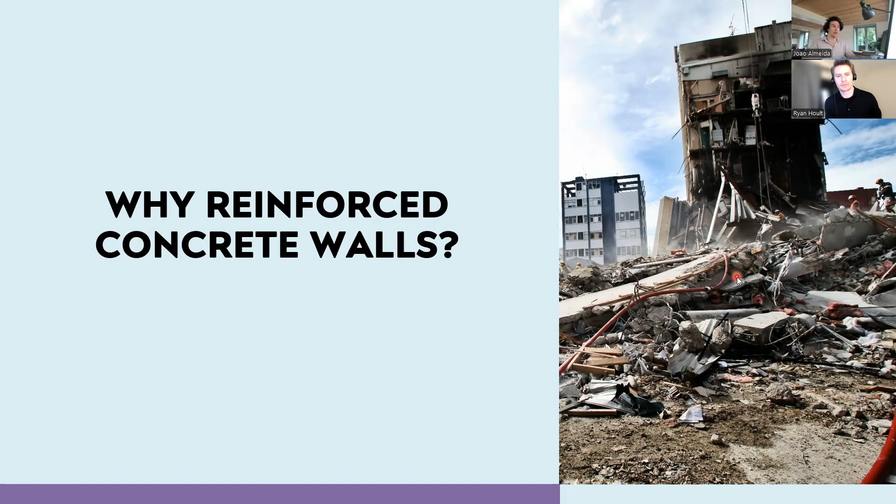So why reinforced concrete walls? As I'm sure you all know, reinforced concrete walls are likely the most effective lateral load resisting system for earthquakes, and also for wind actions in tall buildings, more flexible structures, and they tend to perform very well during earthquakes. But that's not always the case. Here is a picture from Christchurch after the earthquakes of 2011, so it is important to improve the understanding of this type of member.

In Serbia, as far as I could understand, yesterday I did a very quick research on your type of building stock typologies, and if I understand well, reinforced concrete is basically the backbone of your modern building stock. If this is correct, you had a very rapid urbanization from the 60s, 70s, 80s up to the 90s, mainly using prefabricated RC panels, Soviet style.

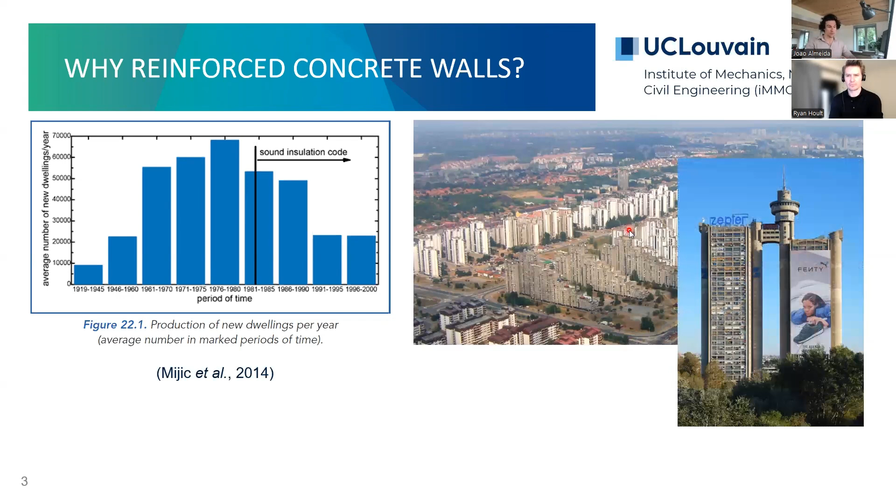And also some interesting brutalist architecture, which is actually something that we also have here in Belgium, namely in Louvain-la-Neuve, where our university is located. But it seems like after the 90s, the pace of construction reduced a little bit. I don't know how things stand now in Serbia, but I am pretty certain that reinforced concrete is your main type of construction, and basically all medium and high-rise buildings in Serbia are made with reinforced concrete, and most of them will have walls.

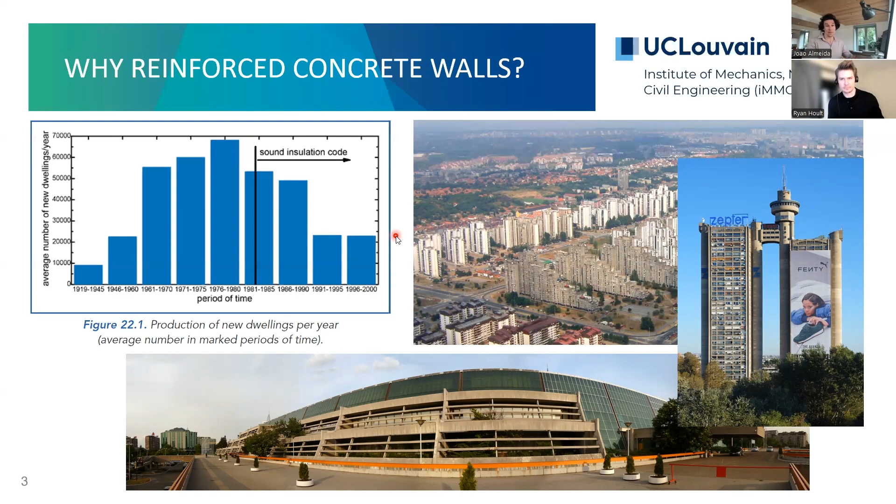I was also not familiar with the seismic hazard in Serbia. I can see that Belgrade and apparently some of the other two bigger cities are mainly in low seismicity regions, but I guess all of your design or assessment of existing buildings in more moderate to high seismicity regions, it would be interesting for you to know a little bit more about walls.

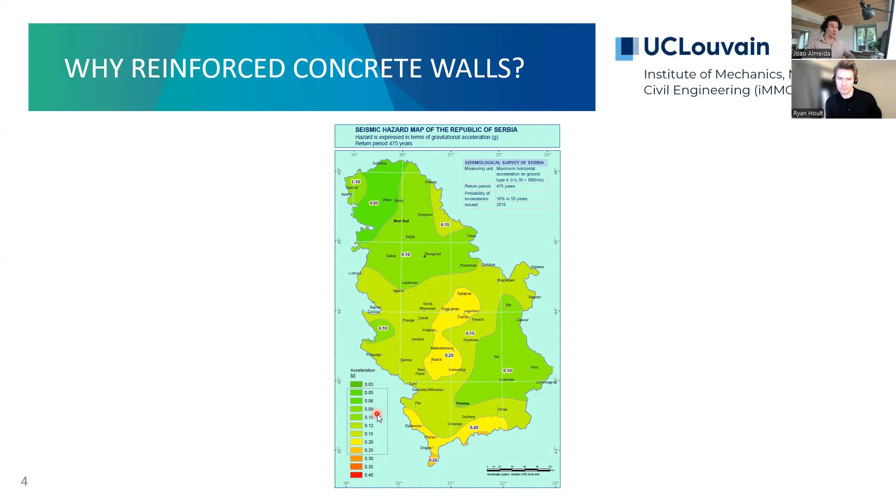So we will basically share with you an overview of our experimental work on different aspects. We were doing research that was always relatively specific, so we will not share all the details, and we will skip all the numerical part. We will basically present the main findings and some key takeaways.

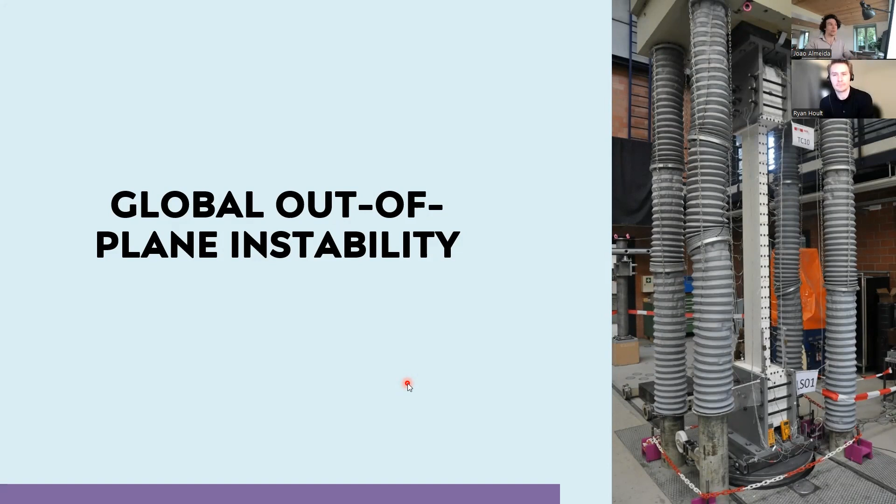So the first topic is global out-of-plane instability. This corresponds to some of my first experimental research when I was still in Switzerland at EPFL. This global out-of-plane instability corresponds to maybe a less known deformation and failure mode for you. You certainly all deal with shear failures and flexural failures, more brittle, more ductile, maybe sliding shear.

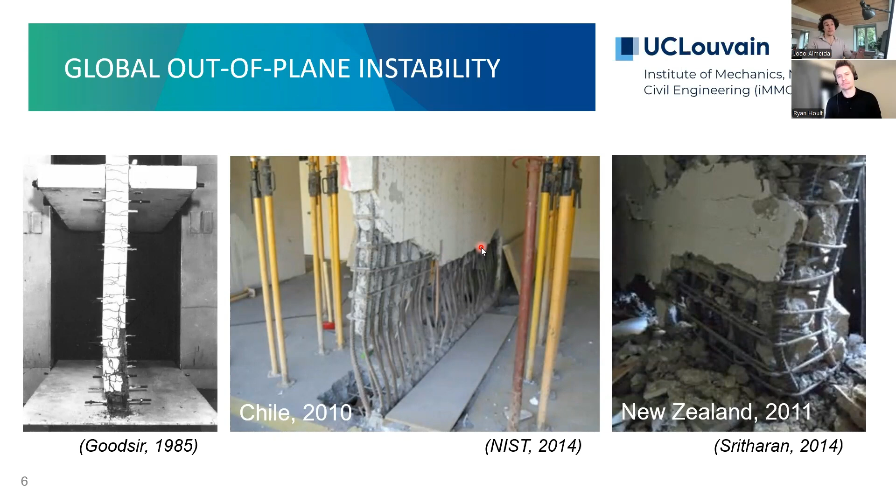So basically, just to give you a quick overview of how this mechanism develops: if you consider a wall under seismic action in this simple representation, you will eventually have some flexural cracks that form at the end regions of the walls. These cause tensile demands in the rebars within the cracks, and these demands, if sufficiently high, will cause the reinforcement to yield.

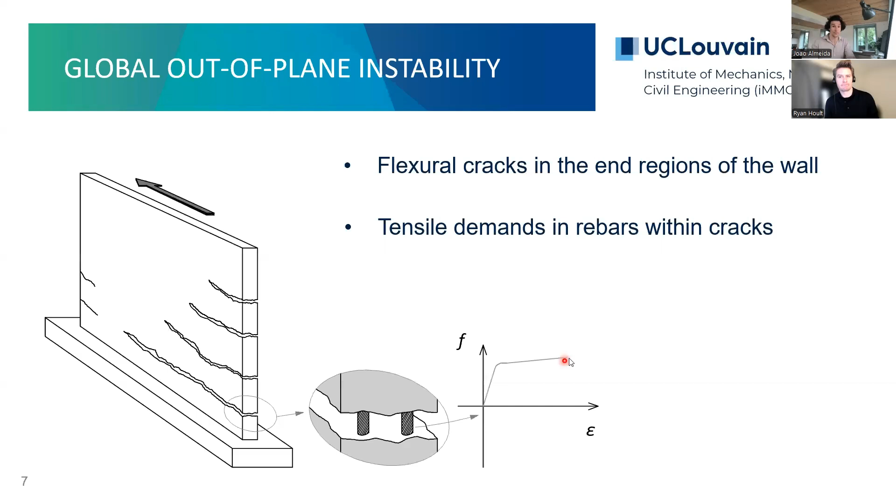Then during unloading, while the cracks remain open, you have all the compression force being resisted by these two rebars—if there are two layers of reinforcement.

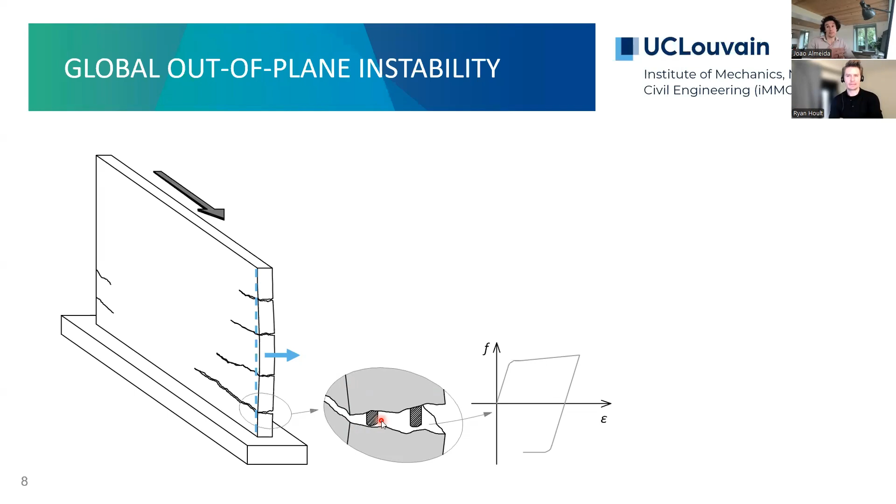In compression, if the cracks do not close, it may even happen that the reinforcement near the concave side, the intrados of the wall, may also yield in compression. At that point the out-of-plane stability is greatly compromised, and there will be high developments of out-of-plane bending moments and an eventual increase of displacements.

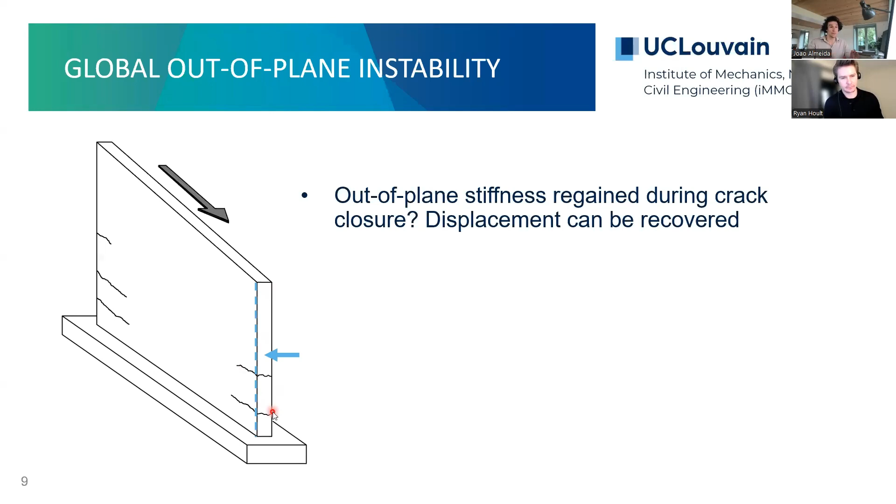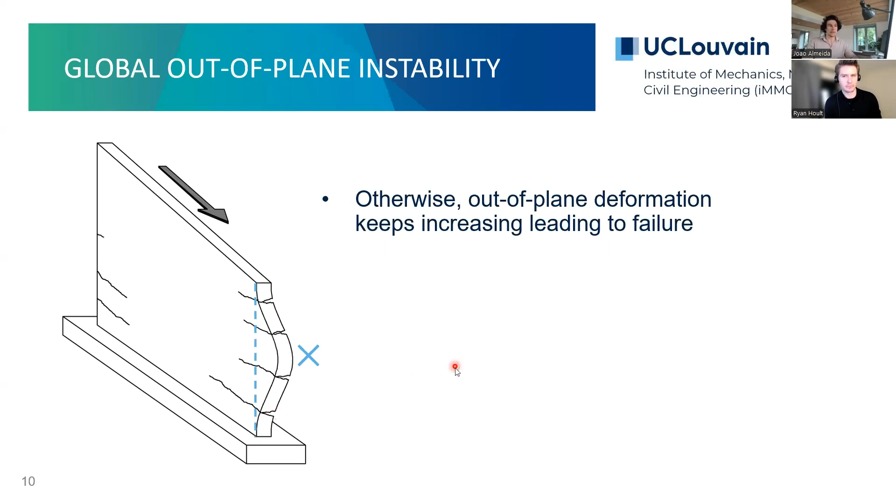At this point there are basically two scenarios that can occur. Either the cracks on the intrados will close and some stiffness will be regained, restoring the verticality of the wall. Or, if that is not the case—if the second reinforcement layer yields before the crack closes—then theoretically at least, out-of-plane displacements can increase and possibly lead to a buckling failure.

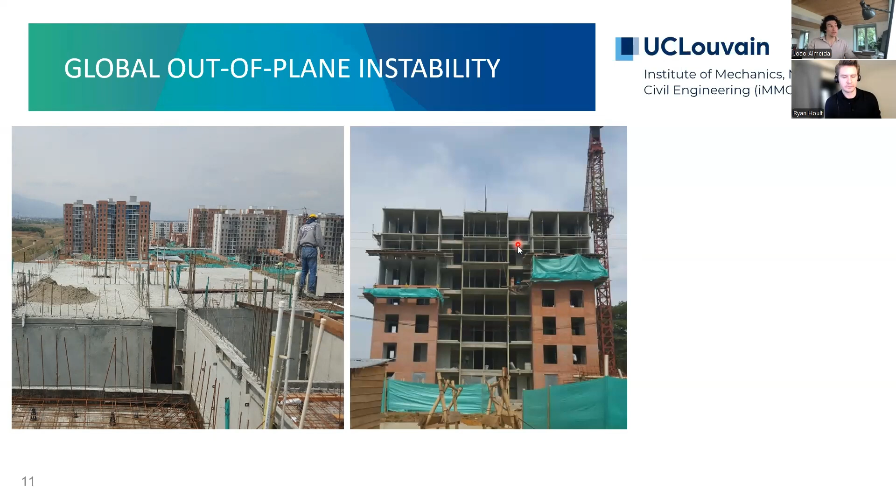So this was basically just a quick context. This was research that started around 2010 in some countries in South America, namely Colombia, where they really started having a massive amount of construction with very thin walls—when I say thin, like 10 centimeters, sometimes 8 centimeters, with just one layer of reinforcement, and besides this, with low ductility meshes.

It was in this context that we started studying this deformation and failure mode, and we tested it through wall tests and boundary element tests. So for instance, here is an example of a wall that we have tested.

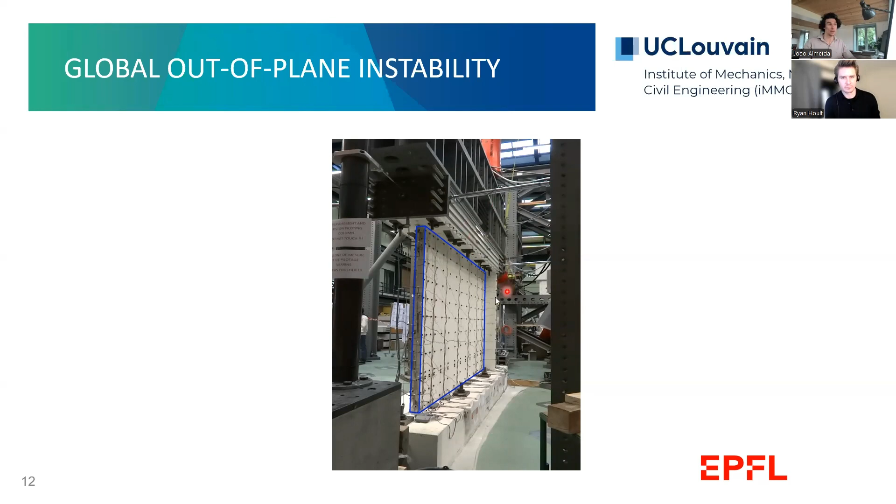There was also vertical loading and bending moments applied, but if you just look at the hysteretic response in terms of force-displacement, you maybe would not see anything particularly specific to this response. However, if you look at the out-of-plane displacement—

now I'm going to quickly play this video, more of a time-lapse, as we load the wall from the right all the way to the left. I'll click it, and you will see the wall starts displacing out of plane, then the cracks close, it straightens up, and eventually the wall will fail.

So basically, in a simple way, we could see that there was some influence of these out-of-plane deformations on the failure of the wall.

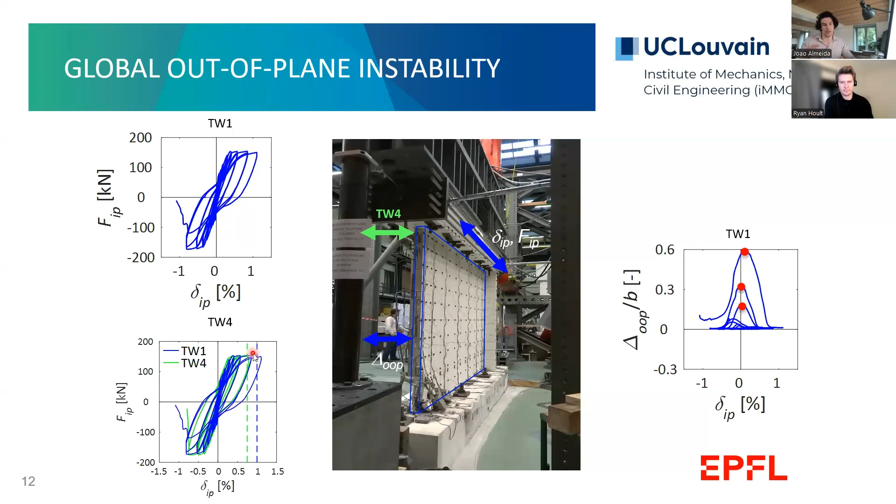We also tested a second wall where we imposed simultaneous out-of-plane displacements at the heads of the wall. We could see that this also caused some decrease in the displacement capacity of the walls. I don't really have much time, and for other reasons I will skip this.

Still within this topic, there was a second experimental campaign that we did, on boundary elements. I don't know how familiar you are with experimental programs, but these boundary elements are tested under tension and compression, and the idea is that for a flexurally responding wall, they work as proxies of the behavior of the wall.

The idea is that you have a simpler loading, just uniaxial loading. The test specimens are also cheaper, so this is a technique that researchers use mainly when we try to analyze the effect of several parameters.

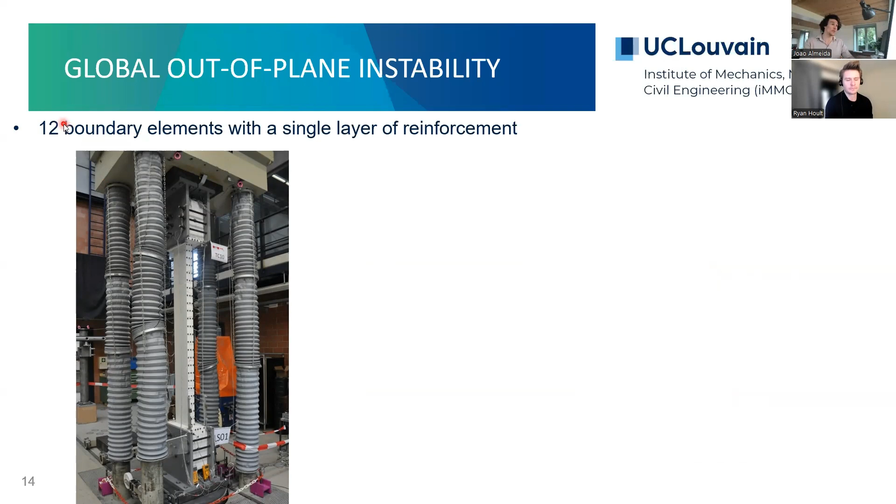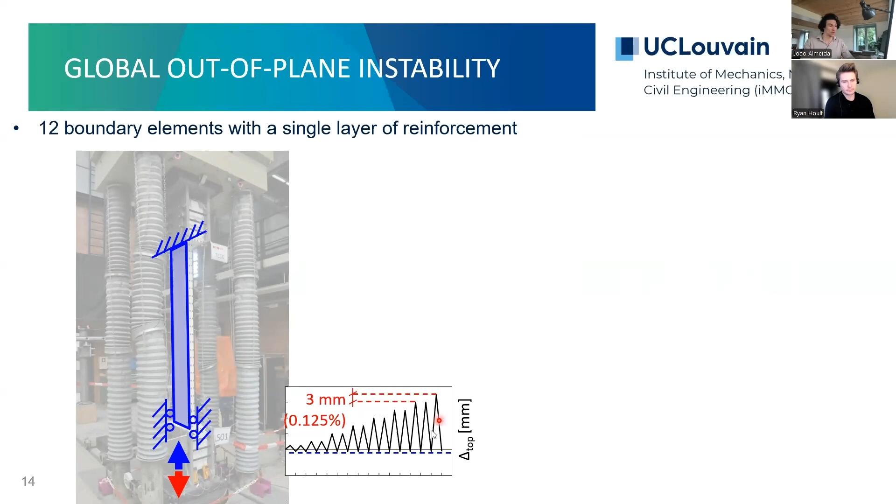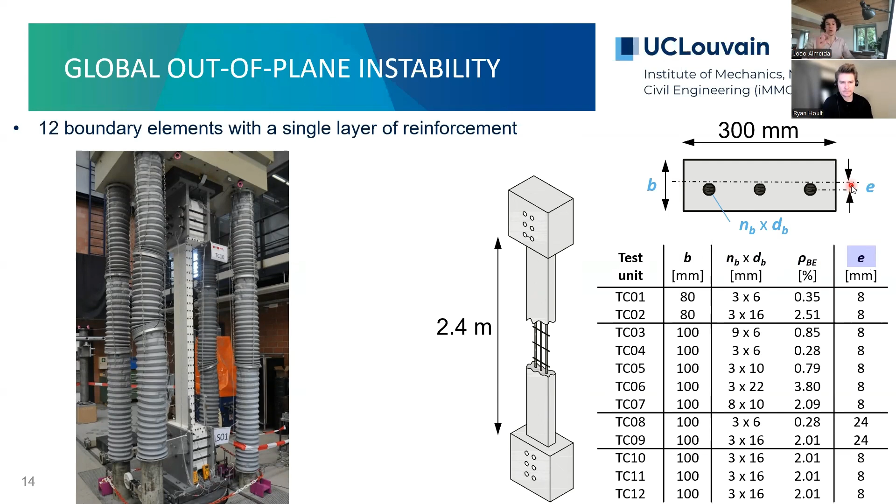Okay, so this is what we have done. We went on to carry out boundary element tests of 12 units with a single layer of reinforcement, very highly monitored. We imposed a top displacement, actually applied at the base of the specimen, with a loading protocol of increasing displacement. We analyzed the effect of several variables: the thickness of this element, the number of bars and their diameter, the percentage of reinforcement content, and finally the eccentricity of the position of this single layer of reinforcement.

The more reinforced this boundary element is, the more prone it is to this instability mode. Now, this was a very extensive study and I will not share more details, because I believe in Serbia you mainly build with 2 layers of reinforcement. A summary of my experience, also with many analytical and numerical studies, is that if you are building with 2 layers of reinforcement and you respect the minimum thickness prescribed in modern codes, such as the Eurocode or the previous codes you are using, global out-of-plane buckling—not local, but global—will generally not be a concern. This is another message I would like to share with you.

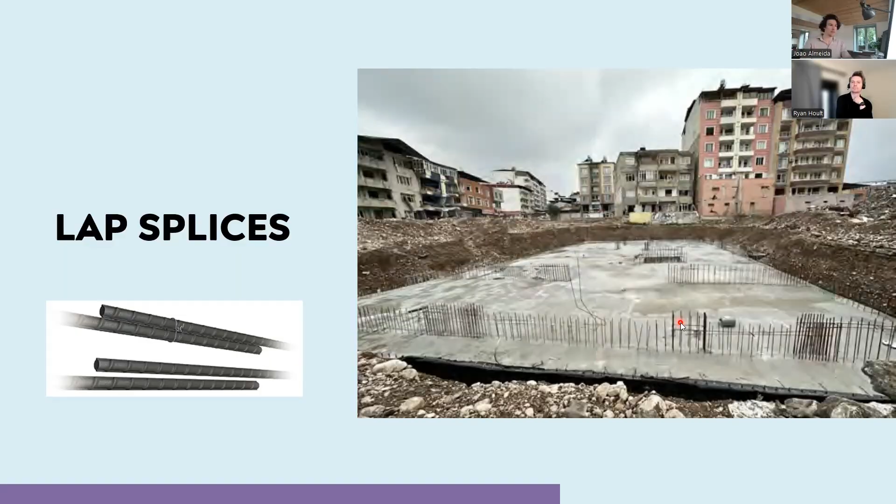So it's something that may be interesting for you as well, to understand a little bit the effect of this design detail. Here we also tested for this topic—we conducted tests in walls and also in boundary elements.

So basically in walls—again, a very simple story I'm telling you—but here what you can see, comparing the cyclic response of a wall without lap splices in blue and with lap splices in red, is that the presence of lap splices, just over this short lap splice length, can actually very significantly reduce the displacement capacity of the walls.

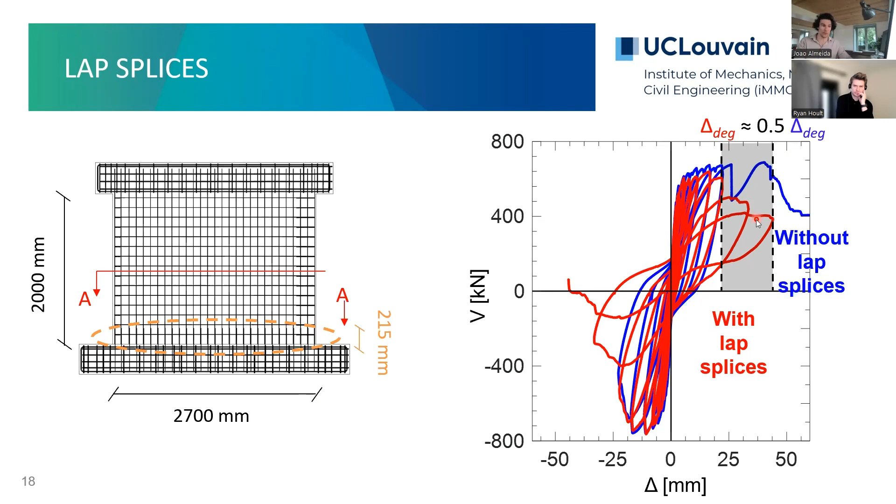Now, at the start of the research, this was already maybe 9 years ago, this is basically what we knew from different contributions of different researchers: that well-detailed lap splices, if they are in the plastic hinge region, will essentially double the reinforcement, and this will force the relocation of the plastic hinge length above this region, which is not ideal because you can have increased shear demands.

But well, so we knew this. We also knew, from several wall tests, that short and unconfined lap splices will possibly mean that the wall will fail even before reaching its flexural strength—it can somehow fail somewhere here without reaching the capacity in flexure. Whereas a medium length and with medium confinement, you can have, as I've shown, a reduction in the displacement capacity.

And we knew, although not in much detail, that some of the parameters influencing the displacement capacity were the lap splice length, the confining reinforcement, the moment gradient, let's say the shear span ratio, and the loading history. So we decided to investigate, using these boundary elements, the influence of each of these variables.

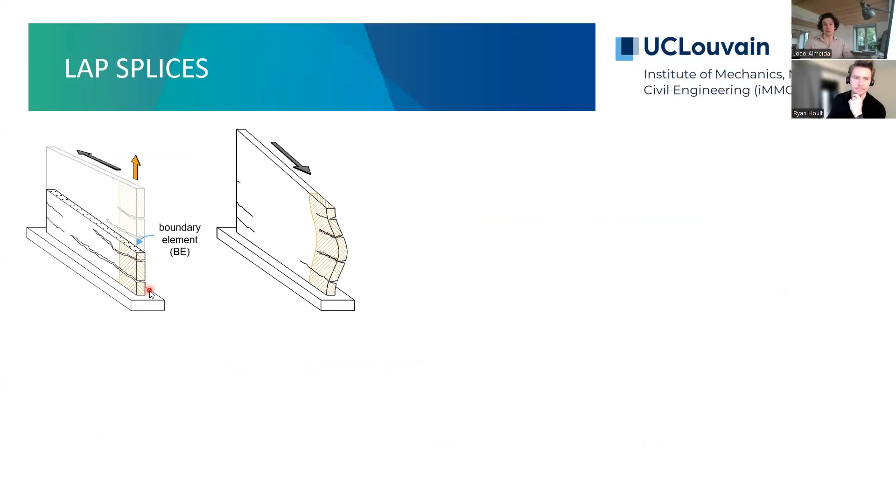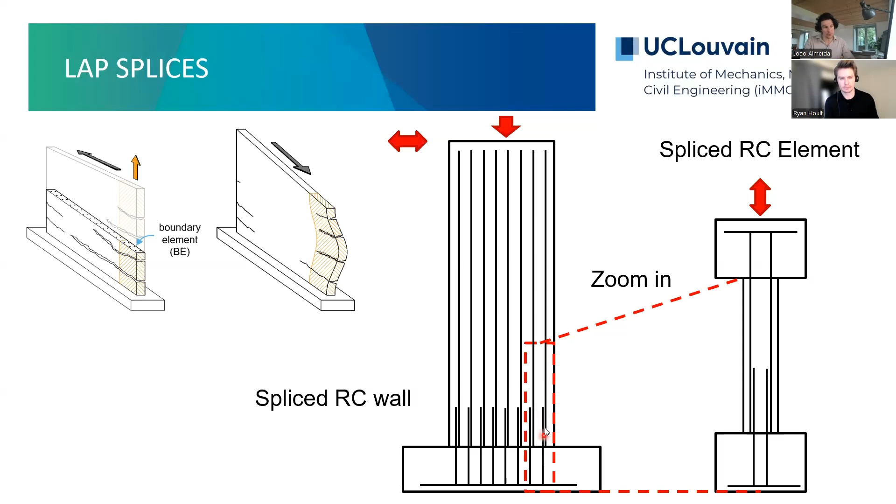These spliced RC elements are supposed to be representative of boundary elements that are mainly subjected to tension and compression.

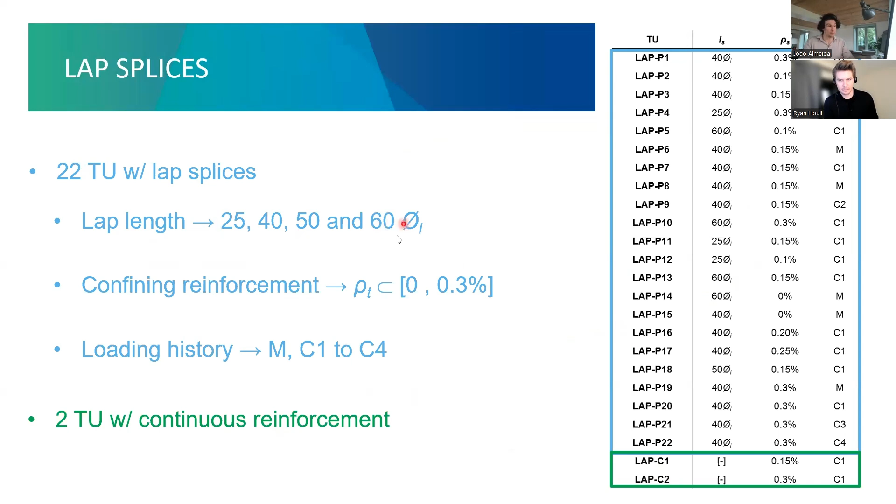We tested 24 units: 22 with lap splices and 2, shown in green, with continuous reinforcement as a reference. We varied the lap splice lengths from very short to pretty long, the confinement reinforcement from 0 to 0.3, and the loading histories from monotonic to different types of cyclic loading.

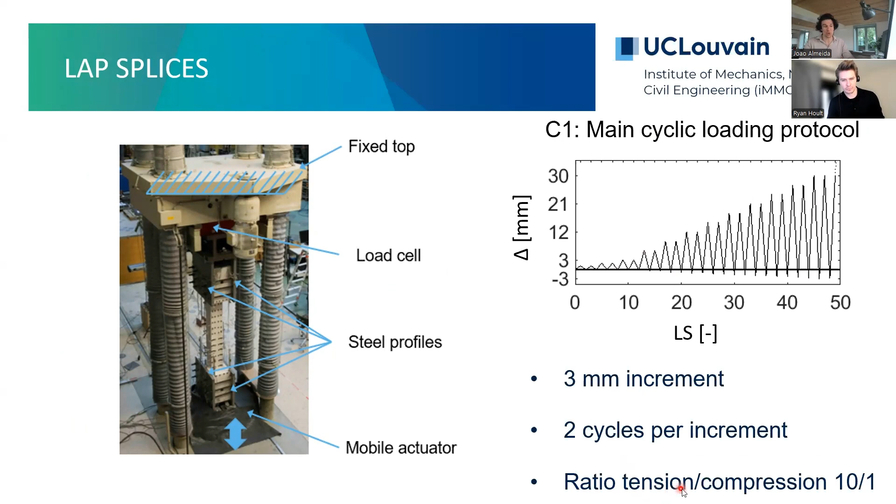The test setup was actually very similar to what I showed before. The main cyclic loading protocol, which we called C1, is very classical, but I want to call your attention to the fact that it has a tension-compression ratio of 10:1. I'll come back to this later on.

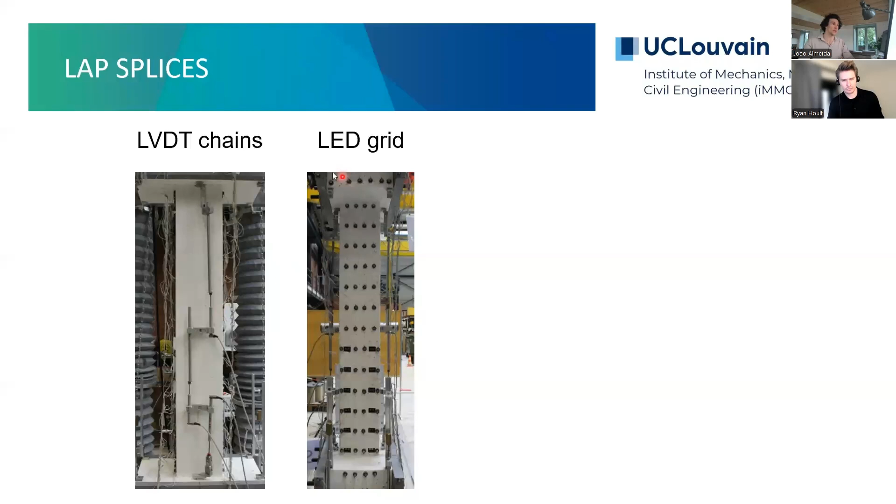So what did we get? We had the wall instrumented, the boundary elements instrumented, and they had...

So at the end of this work, we derived some predictive equations for the strain capacity of the lap splices, which capture the mutual influence between these parameters, namely the lap splice length and the confinement reinforcement, with the two zones that I mentioned before.

So this is just something that, if in your practice as an engineer you come across, could be useful.

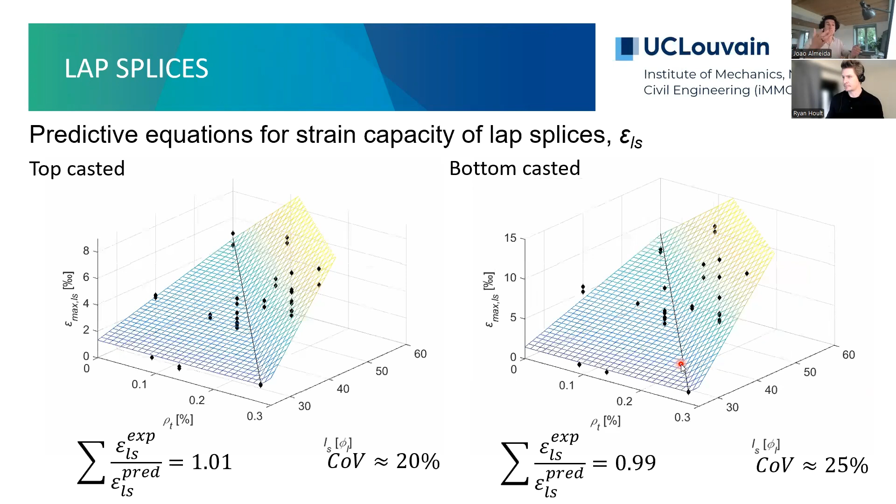Yeah, so this was basically the first two topics. Now I will pass the screen to you, Ryan, so that you can keep giving this little overview.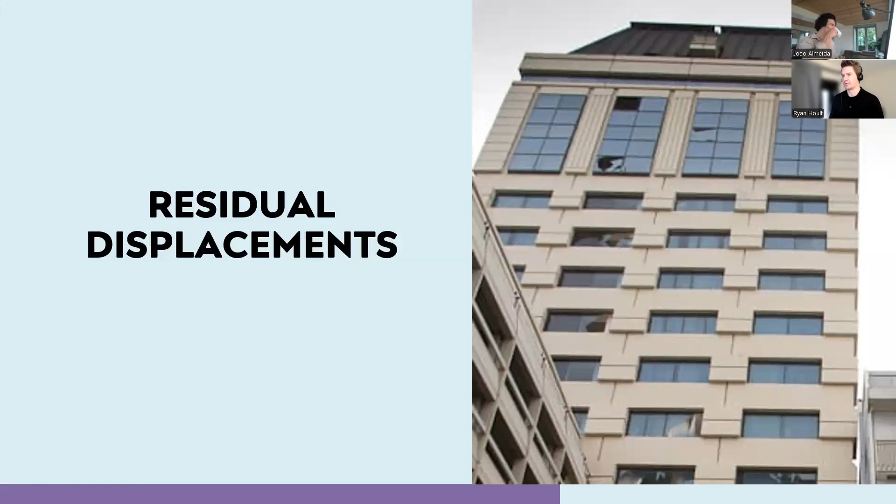I always like to start off by talking about the Christchurch, New Zealand case study for residual displacements, because it was such a profound earthquake in terms of what happened to the actual city itself. It was only a magnitude 6.2 earthquake, but it essentially ruptured right underneath the city itself.

Even with those large earthquake demands, there was fortunately a very limited amount of deaths, with most structures performing pretty satisfactorily, particularly from the point of view of an engineer. We really put this down to the fact that in the 1980s capacity design was introduced, which really helped the design of reinforced concrete structures.

And it was also linked to this performance objective of life safety, where you effectively allow the occupants of the building to evacuate. So you really wanted your building to still be standing. Hopefully my internet is okay, I'm getting messages that it's not great, so hopefully it's all good still.

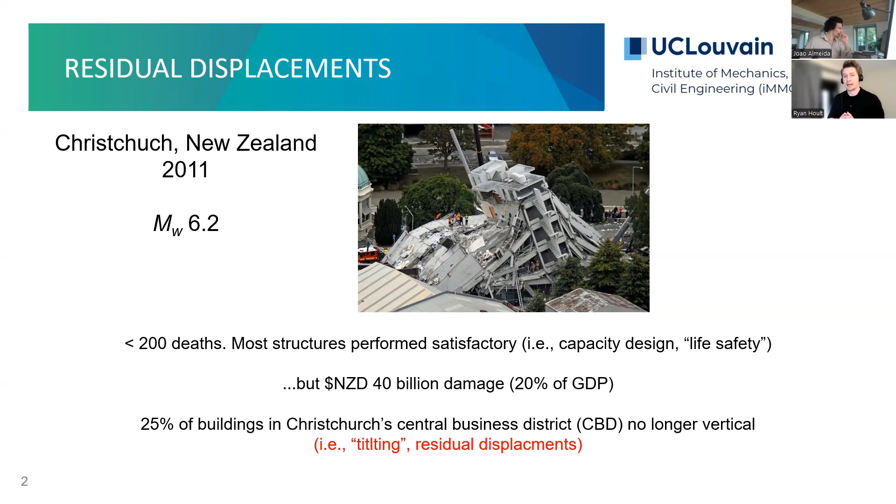Even though there was limited damage, it still cost the New Zealand economy about 20% of their GDP, so that's $40 billion worth of damage. And it wasn't necessarily because of collapsed buildings, it was mainly because roughly 25% of the buildings were no longer vertical, meaning they had some sort of tilting. This is when residual displacements become reasonably important, because they're essentially a measure of how much a building is tilting, and how much damage there actually is.

To emphasize this further, 60% of the reinforced concrete buildings were demolished, considered uneconomic to repair, simply because of those tilts, not because they had actually collapsed. So there has been a sort of design shift recently, in the last decade or two, to concentrate more on low damage technologies for large earthquake events, rather than just this life safety performance objective.

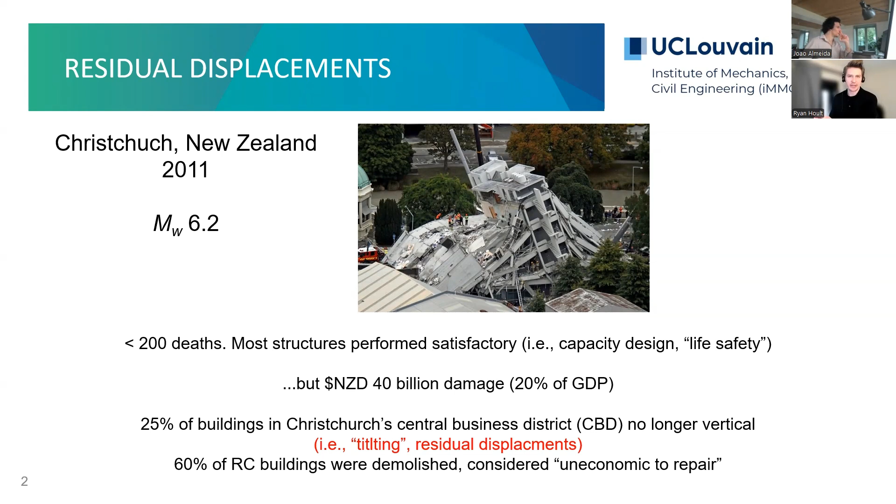We have the capacity to do that with things like base isolation, but they can be very expensive and complicated to incorporate into your design. So one of the things that João and I have been investigating is how we can implement low damage technologies in a really simplistic way.

When I refer to residual displacements, one way we derive that: if you think of a quasi-static reverse cyclic test, this is a force displacement plot. We look at the displacement the wall is pushed to, and then on returning back towards its center position, we look at the displacement it tries to return to at a force of zero.

So that is essentially the residual displacement corresponding to that in-plane drift. One of the ways we're coming up with ideas on how to implement low damage technologies in a cost-effective, simplistic way to implement in construction is just by substituting the reinforcing steel bars.

João tested these walls a few years ago. One wall was reinforced with conventional steel. The other, if I get my highlighter out, was reinforced with what's called shape memory alloys over a really small length at the base. These shape memory alloys, I'll explain more in the next slide, but they can be very expensive, about $500 per meter. The idea is not to have them extend throughout the entire wall, but over a very short length at the base in the plastic hinge zone.

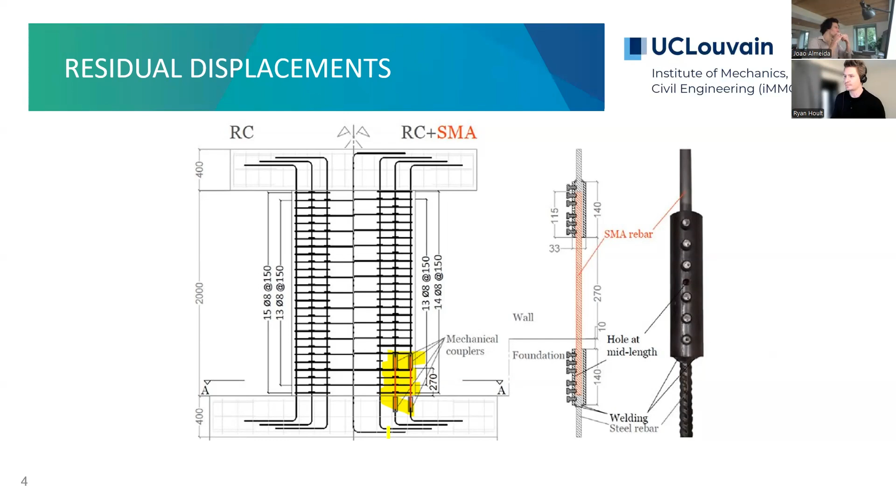To give you a quick summary of what shape memory alloys are: they're essentially special metals that can remember their original shape. When you bend or stretch them, they can return to their original shape, either through superelasticity or, when heated, through the so-called shape memory effect. This is what makes it useful in concrete structures, because they can absorb energy during earthquakes and recover, effectively reducing the damage.

This superelastic effect is only possible because the material essentially deforms in the martensite stage, under the stress imposed, and it's able to return to its austenite stage after the stress is released. So that's a very quick summary of what shape memory alloys are.

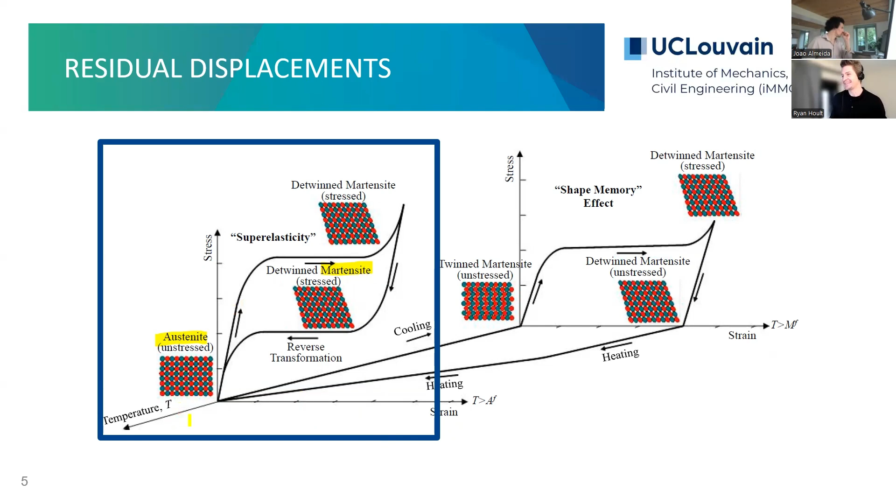This is a force displacement plot of the two walls. In gray, the reinforced concrete wall reinforced with steel. In black, the force displacement plot of the shape memory alloy wall, which again is only over a really small length at the base. What you can see from these plots is they're very similar in terms of force displacement behavior, but we're interested in whether residual displacements were reduced by introducing that shape memory alloy.

The way we check that is by looking at each one of the peaks in terms of the drift imposed, then looking at how the residual displacement on returning to a force of zero is reached, and plotting that. So we have two relationships here: in gray, the steel reinforced concrete wall, and in the highlighted blue line, the reinforced concrete wall reinforced with shape memory alloy at the base.

If we assume, for example, a limiting drift of 0.5%, after which it's uneconomic to repair the structure and you have to demolish it, you can see that for the steel reinforced wall you're reaching that at about 1% drift. But if you introduce a very small length of nickel titanium shape memory alloy, you're almost getting double the in-plane drift.

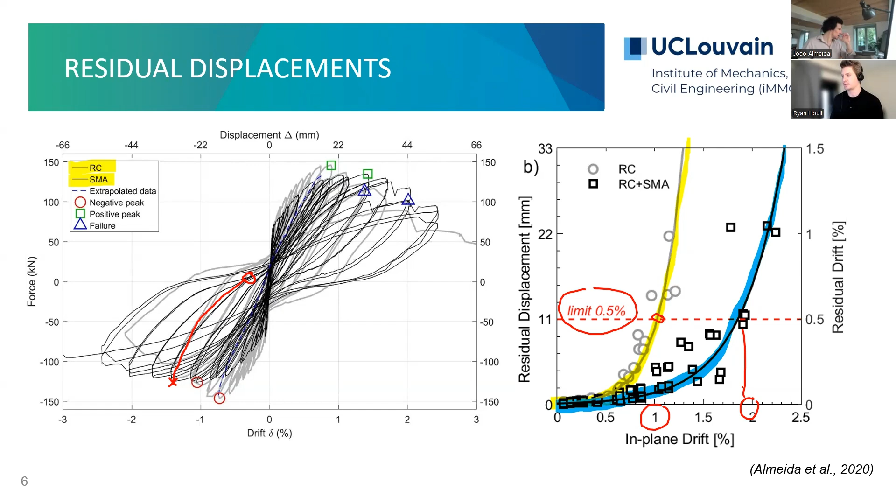So this is a quick overview of some of the work we've done with shape memory alloys. We think it has potential for reinforced concrete structures. It's still expensive, but we're currently investigating things like iron-based shape memory alloys, which are about a fifth of the cost, and also other materials such as GFRP reinforcement, which João will talk about briefly at the end of the presentation.

I wanted to change gears now and talk about another research focus of ours with reinforced concrete walls, and that is torsion.

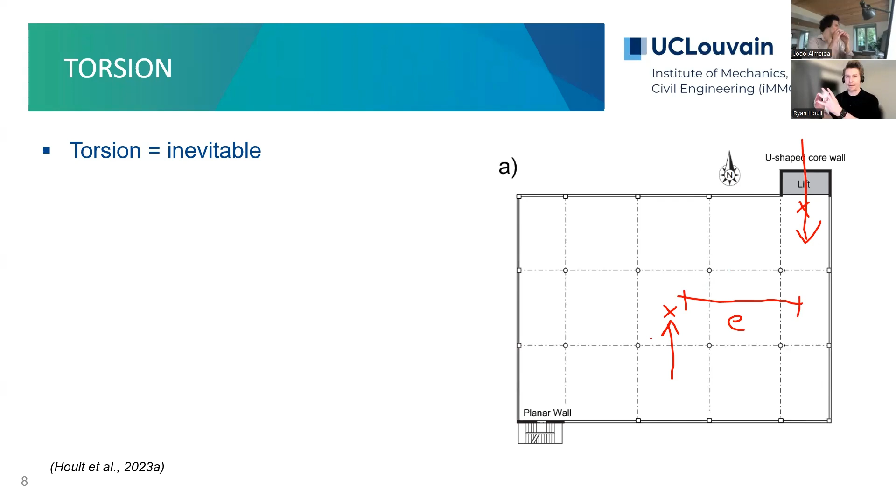The earthquake ground motions are going to essentially provide that earthquake force through the center of mass, but your inertial response will really come through the center of stiffness. It's this eccentricity distance and this force couple that's generated which really makes this building twist. And then this core will really have to do most of the work in terms of resisting those torsional actions.

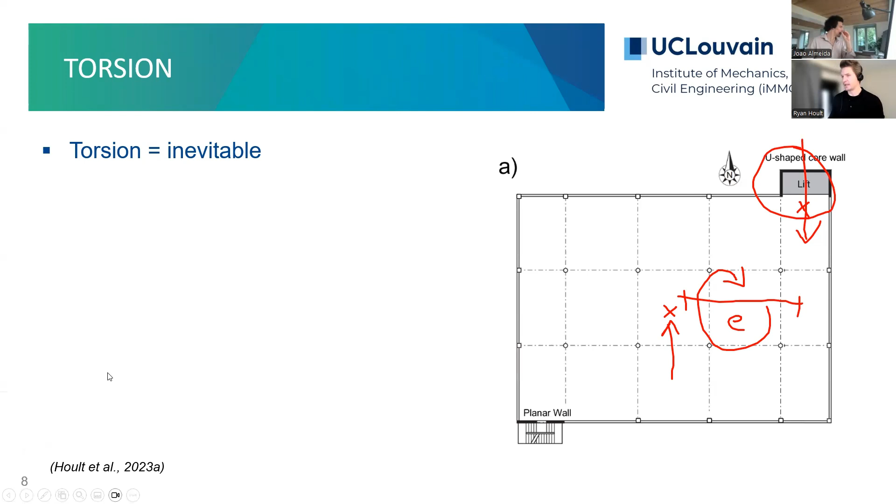Even just stating all of that, there is really a limited amount of research that has been performed on walls for torsion. So we decided in 2022 we would instigate an experimental program where we would subject a wall to torsion. So this is the U-shaped core wall, if I erase all the text. This is the U-shaped wall cross-section that we tested, with the reinforcement detailing.

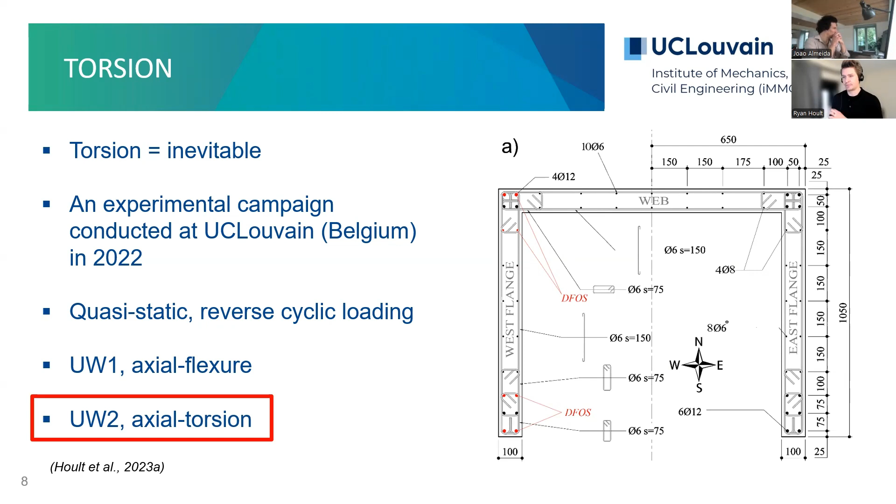These were very standard quasi-static reverse cyclic tests. The first wall we actually tested in flexure, so we just bent it back and forwards essentially. But the second wall we rotated about its vertical axis in torsion. And it's this wall that I want to primarily focus on over the next couple of slides.

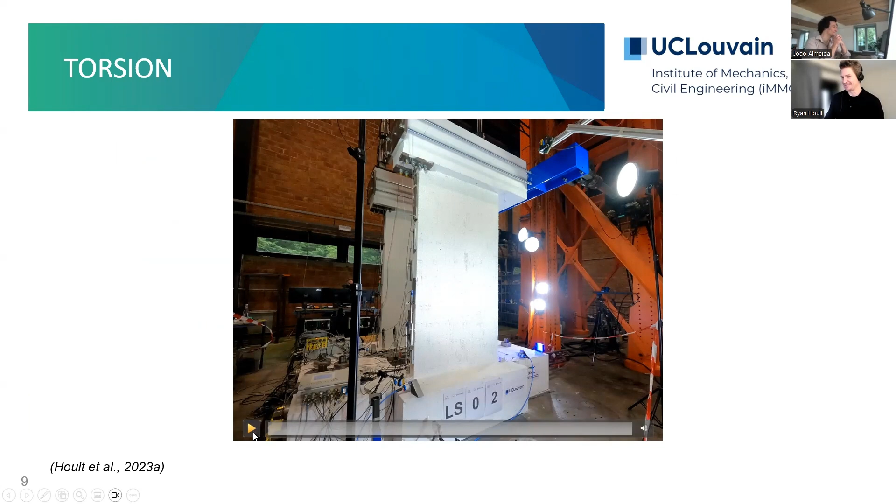Hopefully my bandwidth isn't too bad to show this video. Okay, I'm getting João's reaction there, so maybe it's not too good. But I will play this video anyway.

It's a time-lapse video of the wall rotating back and forwards. And what you'll see in a moment is the wall panel in front of you essentially will start to fail, and it will fail towards the boundary end, and it kind of rips open more or less once it reaches really large rotations. You'll also notice the heavy amount of instrumentation that we used to monitor the wall and collect data.

This was really important for us because, as I mentioned, there really is a lack of information on how these walls perform in torsion. So it was really important that we collected a lot of data so that we can then validate numerical models and analytical models as well.

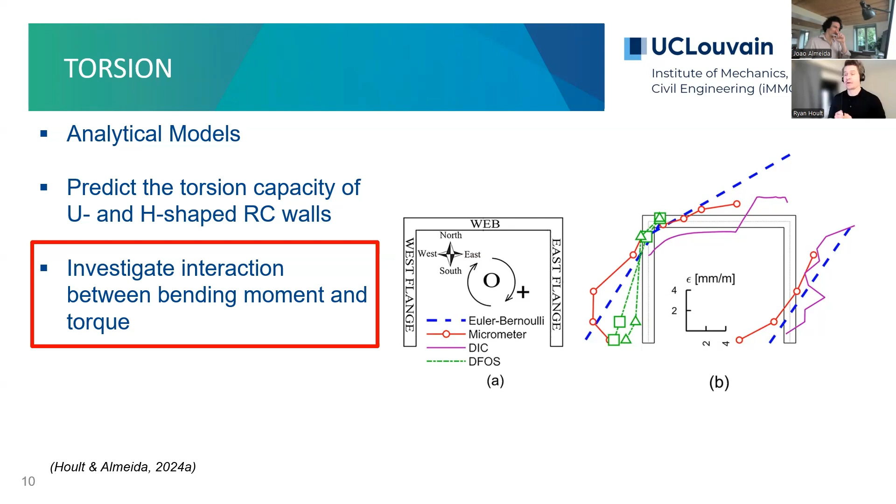Okay, so once we collected that data, we then moved on to thinking, well, how can we essentially try to predict or simulate the torque and the rotation of these walls in a very quick and easy way? One of the things that we wanted to investigate was what is the interaction between the bending moment and the torque. One of the primary things that we wanted to see was whether there is a reduction in the bending moment capacity when you introduced that torque into the system.

So we adopted a very simple analytical model that was done in 1981. It was originally done for beams, but we modified it for cantilever walls with axial loads and other things like confinement. I obviously don't have a lot of time to go into the heavy details of the analytical model, but this is just really to show you that the analytical model did a really good representation and simulation of the torque rotation response in comparison to the quasi-static test that I just showed you.

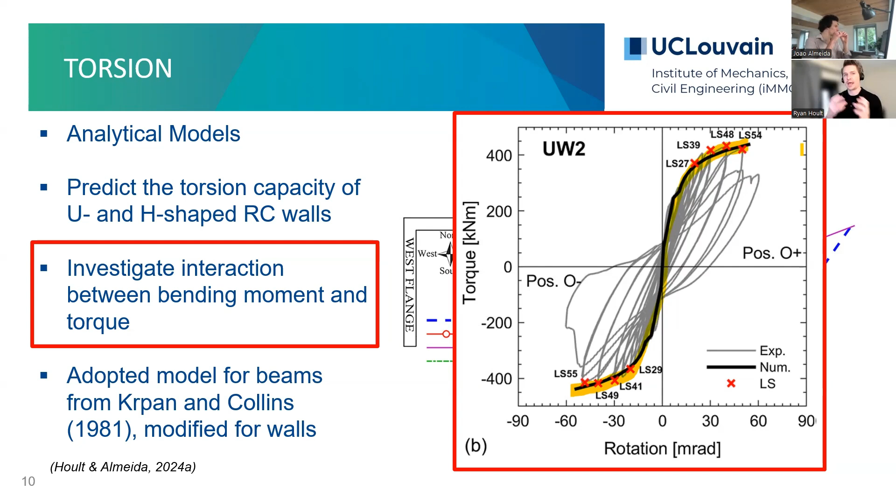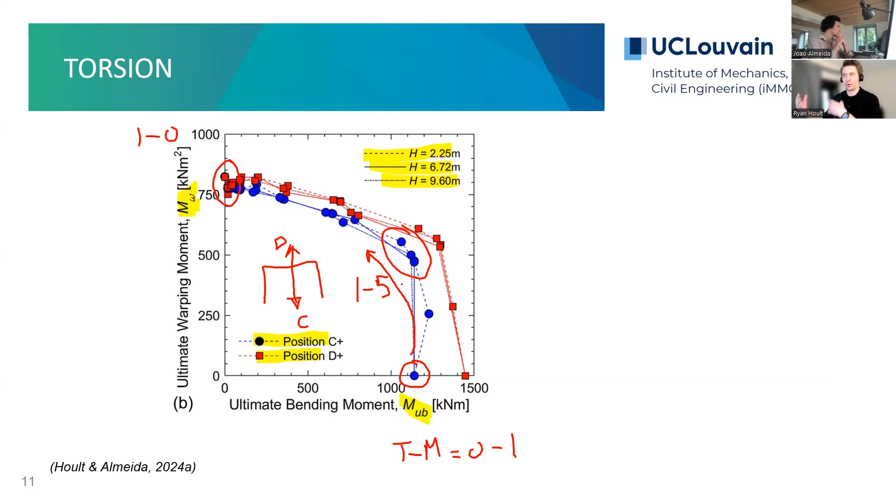This, of course, has some built-in assumptions. I'm simplifying it down for this presentation, but for the sake of argument, this value C represents almost like an effective height where you apply a concentrated torque to get that ultimate warping moment at the base of the wall. So following that logic, we can then calculate what the torque is in the wall.

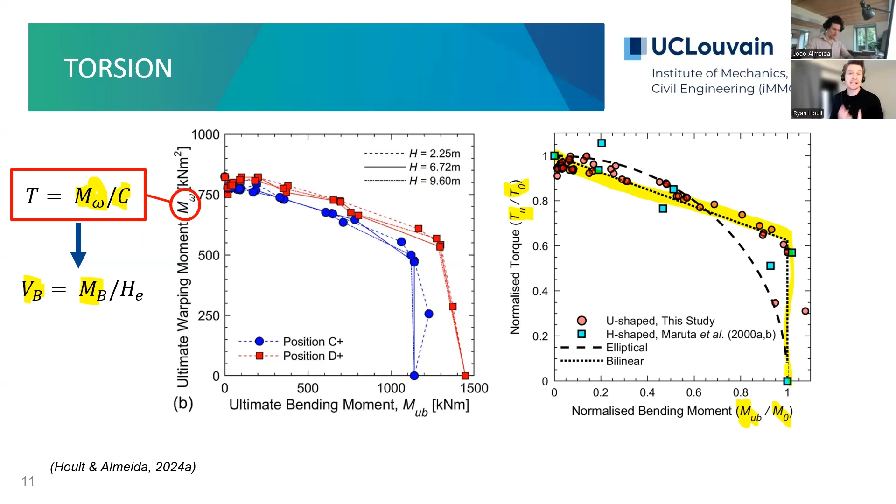So we wanted to start thinking about how we could maybe revise building codes in the future and help engineers actually design for these things. But we also thought this analytical modeling approach is a little bit complicated, and we don't expect everyday engineers to actually use this. So we wanted to think about how we could provide really simple design calculations to estimate what the ultimate torque of the walls are, that engineers can actually use.

The first thing we thought of is we looked at how these walls bend and what those strain profiles would look like. For example, the wall on the left is bending with the web at the back in tension — the pink strains are tension, and the blue strains are compression. Conversely, on the right-hand side, you have the web of the wall bending in compression.

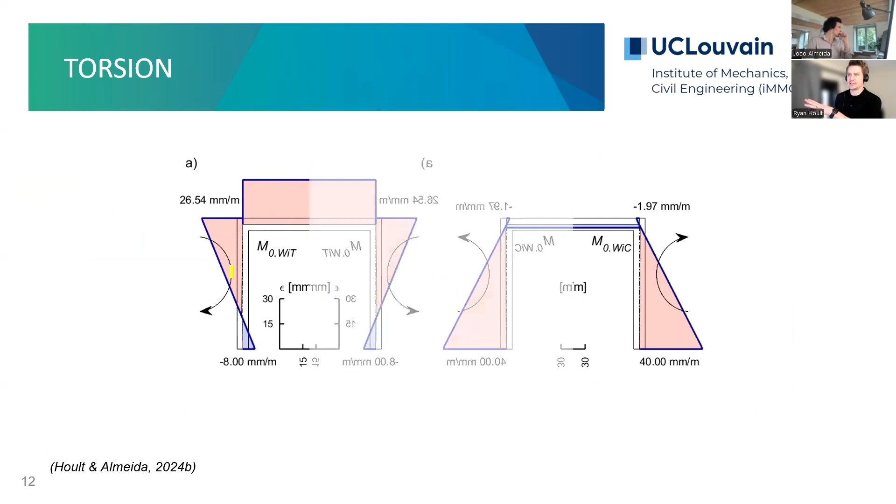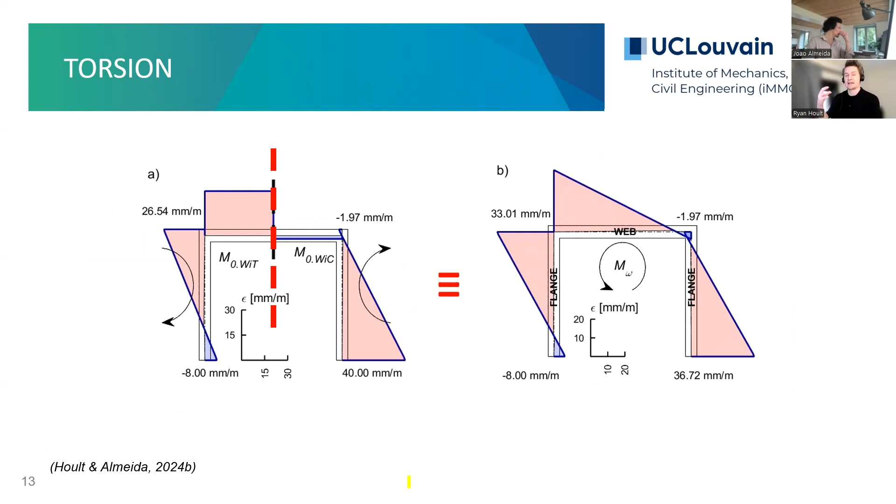If we cut these sections in half and combine these two sections, what you end up getting is some sort of strain distribution that looks like this. We realized that this strain distribution, which I've redrawn here a little better, looks very similar to the strain distribution you get when you provide torque to the wall and it's governed by warping at the base of the wall. So we thought that if we can calculate the bending moment of the wall using these principles, it might be possible to estimate the warping moment of the wall.

And then, of course, we can estimate the torque from there. I'm not going to go too heavily into calculations, although I do have a few equations on the next few slides, so I apologize if it's a little bit too heavy. But basically, we came up with this warping moment equation, which we think you should be able to readily calculate using the software or principles you already know from just a normal wall design with bending moments.

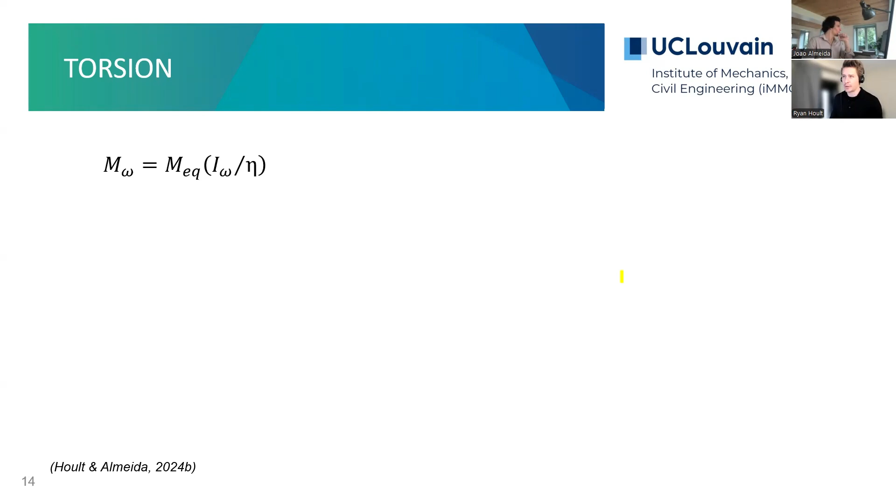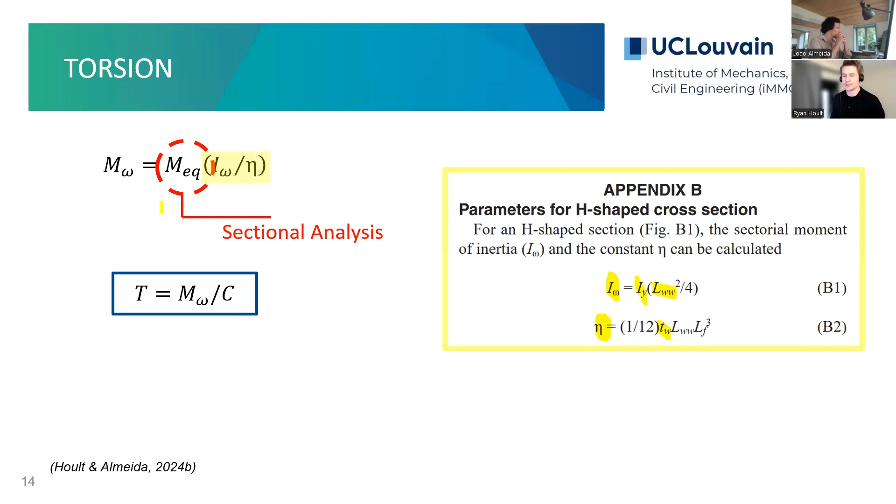So to give you a very quick example, these parameters here that I've highlighted are really just dependent on the wall cross-section. In the paper we've written with all of these equations, we've provided the equations for these two parameters in the appendix. You'll see they're really dependent on things like the wall length, wall thickness, or the second moment of area—things engineers can calculate pretty readily. The other thing here is this equivalent moment, the MEQ, is just something you should be able to calculate from a sectional analysis. So if you can readily calculate those things, you can then readily calculate the torque or the ultimate torque of the wall.

This was important because it gives you your torque to moment ratio, which will be used for your interaction diagram on the next slide. This is indicating, for example, that you've got a bending moment about 2.5 times larger than the torque introduced in the system, but it's quite a substantial amount of torque. So what we want to see is that ultimate bending moment of the wall significantly reduced because of the torque.

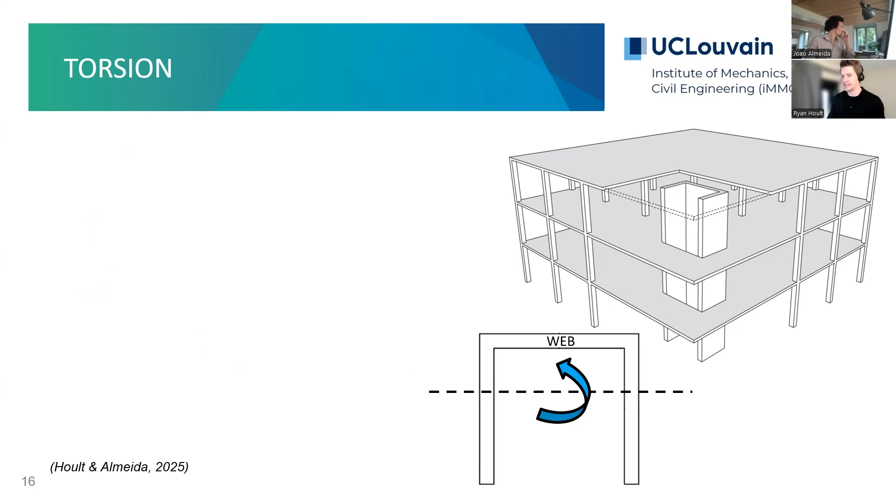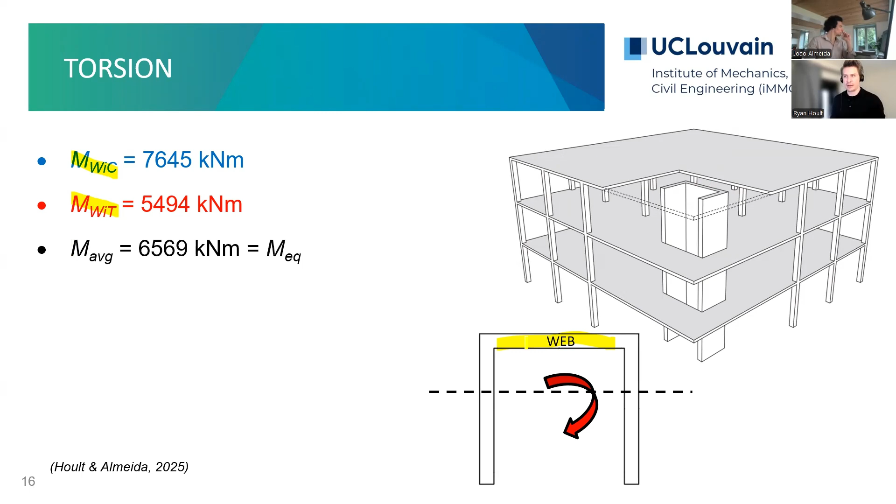So very quickly on how you could do this: first you do a sectional analysis to work out the ultimate bending moment of the wall with the web of the wall in compression—bending it in one direction. The moment of the wall web in compression is this. Then you bend it the other way, sectional analysis, and you get another bending moment with the web of the wall in tension. If you take the average of those two values, this is your equivalent moment that feeds into the equation for warping moment, along with those two parameters explained earlier that are simply based on your section size—things like wall length, wall thickness, and second moment of area.

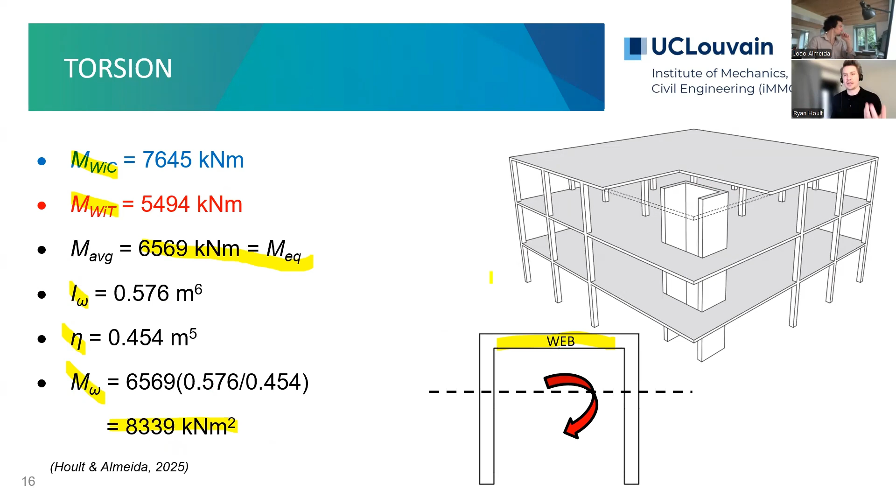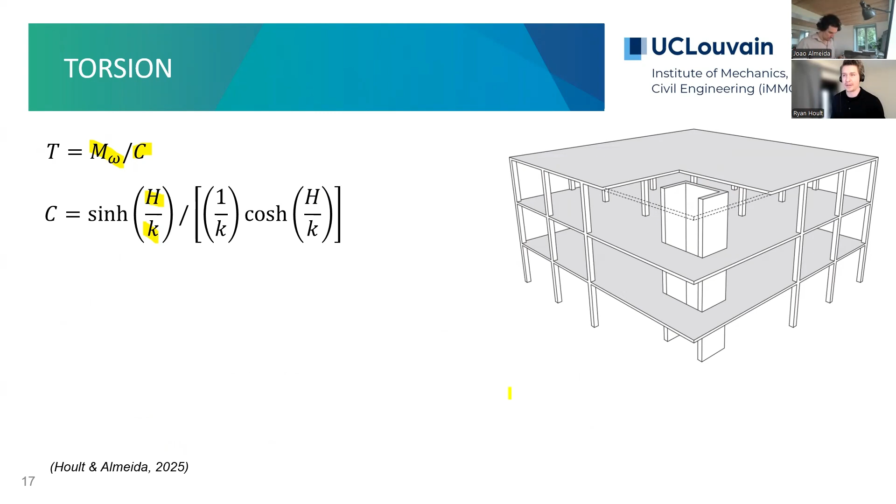You can then very quickly calculate what your warping moment is, and then calculate your torque just by using this equation—your warping moment divided by your value C. I don't think I'll have enough time to talk about where this equation comes from, it's a closed form solution. It's essentially based on the height of the wall and this characteristic length, also known as the torsional bending constant. I'll just quickly go through this to say you can readily calculate the value of C and then readily calculate what the ultimate torque of the wall is.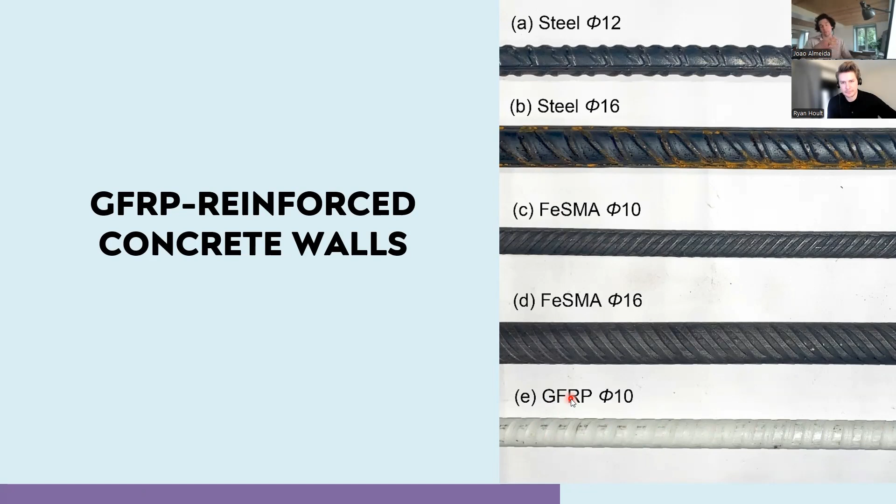This is what we've been exploring: alternative reinforcement materials for walls. More recently we've been focusing on analyzing GFRP, which stands for glass fiber reinforced polymers, that has been attracting a lot of attention from designers and industry, namely due to durability reasons, because this is a product that doesn't corrode.

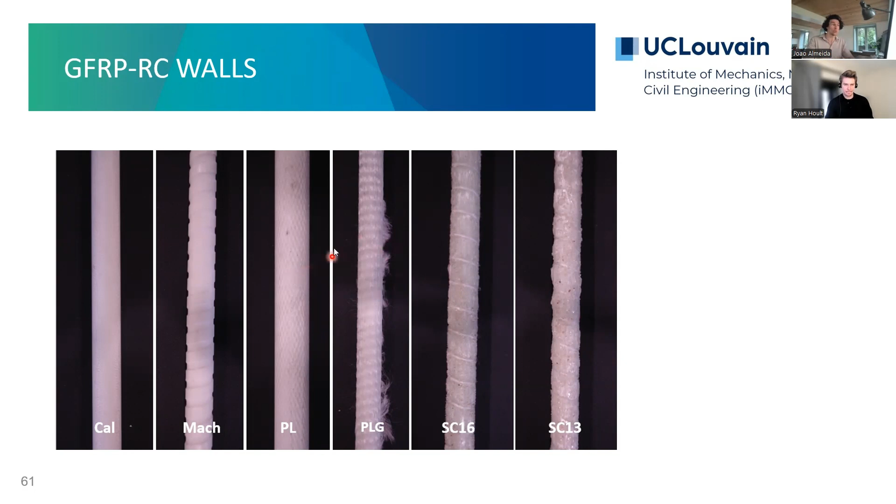So they are very strong, maybe 1,000, 1,100, 1,200 megapascals of strength, and they are continually undergoing technological development.

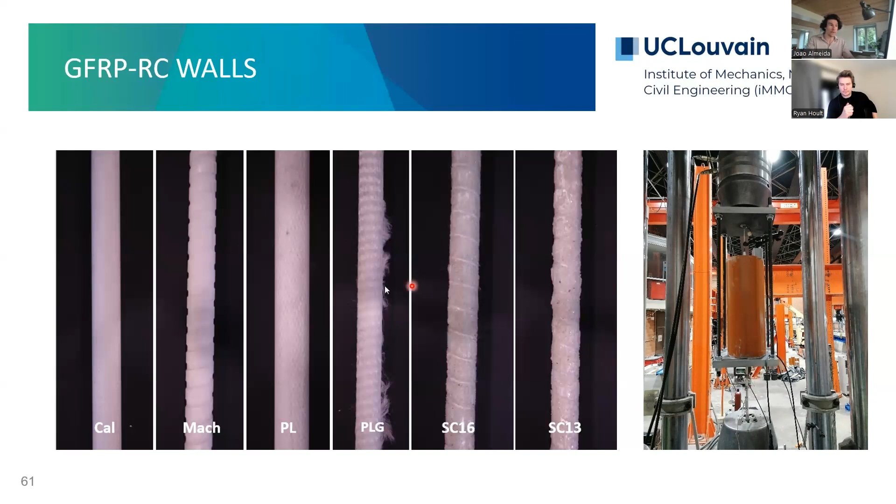We have quickly done several tests over the last year and a half, for instance on bond strength. As you can see, there is huge variability and continuous progress. The bond strength is highly variable, so there's still a lot of room to explore.

We are also using more and more advanced instrumentation in our experimental tests, namely distributed optical fiber sensors that we glue along the rebars, which allow us to understand the evolution of strain profiles along the rebars, giving very interesting information.

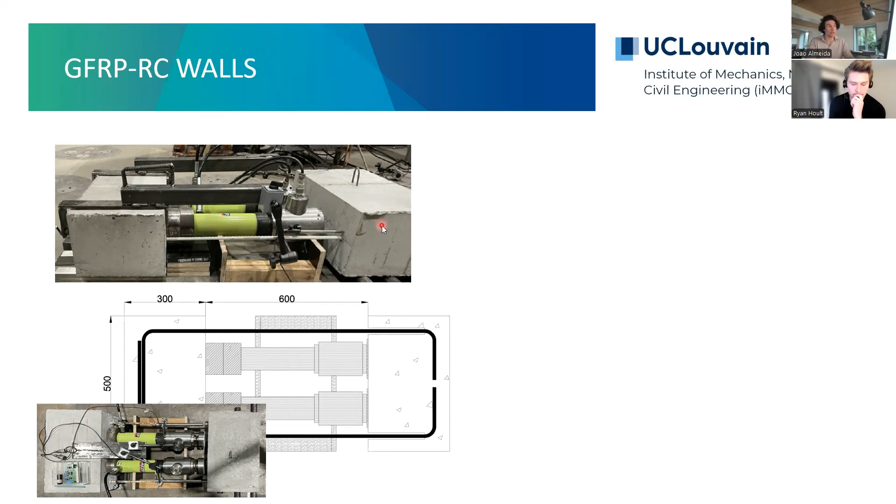Recently we concluded a campaign where we managed to test the bend capacity of a rebar, where part of the rebar is unbonded. We performed 30 tests here, which gives us an idea of how much strength the bend actually takes.

With respect to the tensile strength, we see it's highly affected by this radius, or the ratio between the bending radius and the diameter.

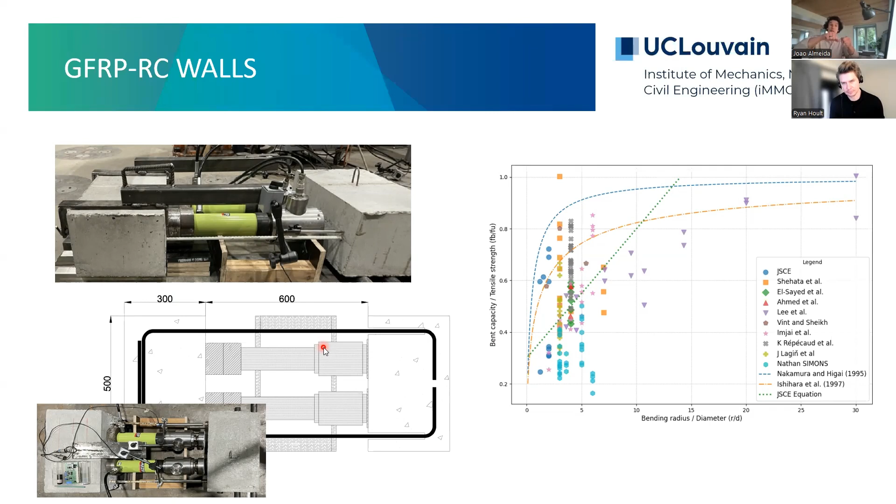Our specimens were towards the low side, the blue ones, because it's a new resin which is fully recyclable and thermoplastic, allowing these bars to be bent directly on the construction site. But of course, the idea of these preliminary tests is to move toward understanding how these GFRP materials would behave if applied within a wall.

Now we have finished the construction of a GFRP cage. I don't know if I can show you the video here. This is a little video just to show how flexible these rebars actually are.

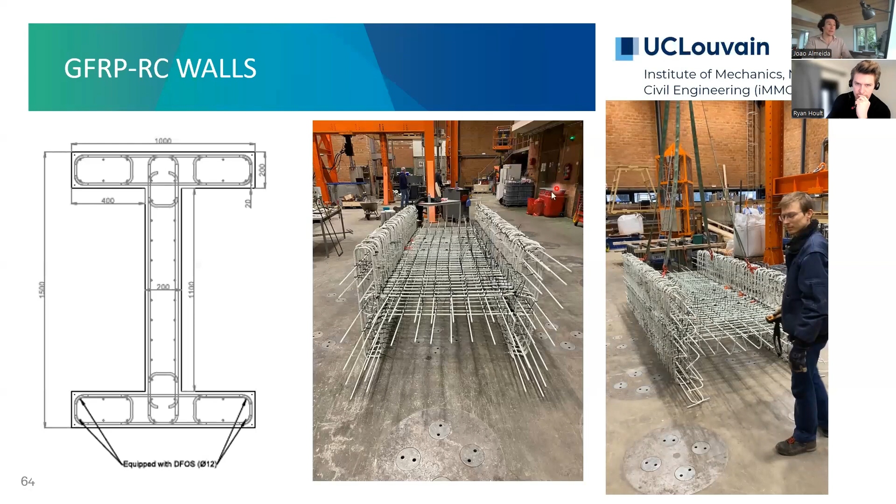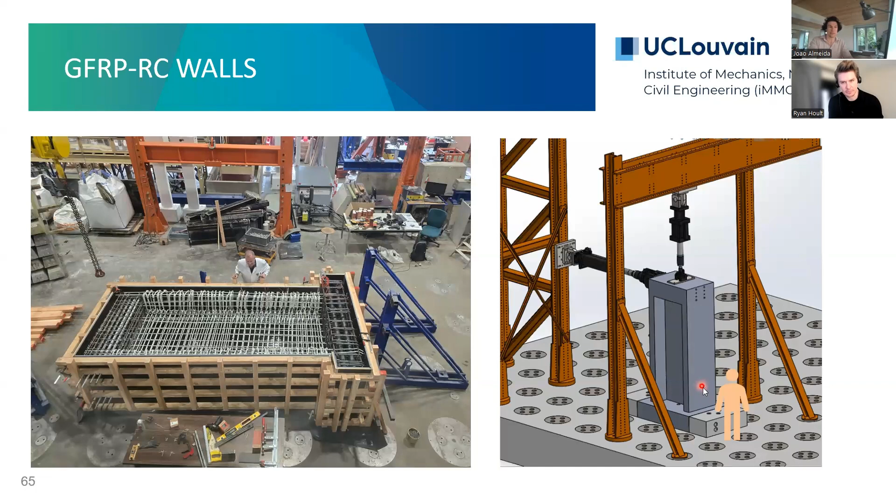The tests will be starting soon; we've finished, this is a photo from yesterday, the cage and formwork are completed, we'll test it next week, and in one month we'll be testing this wall with more or less this type of test setup.

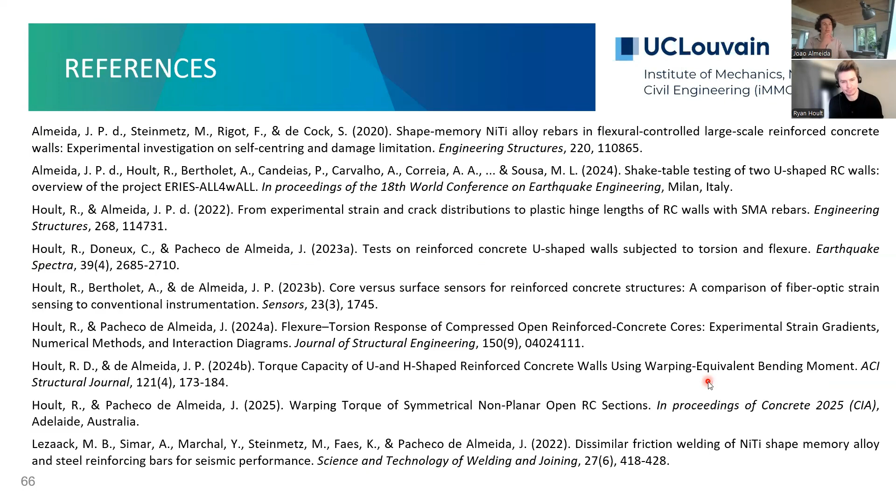Of course, we have many references we could share. This was a very quick and somewhat superficial overview, but we're very happy to share more details if you're interested. We have our contacts here, and we'd welcome feedback from you, namely regarding the challenges you are facing in practice, maybe for possible inspiration for our future experimental research over the next 10 years.

Again, I'm sorry we overpassed the 50 minutes a little bit, but hopefully you can take something useful out of our presentation, and we're happy to try to answer any questions you may have.

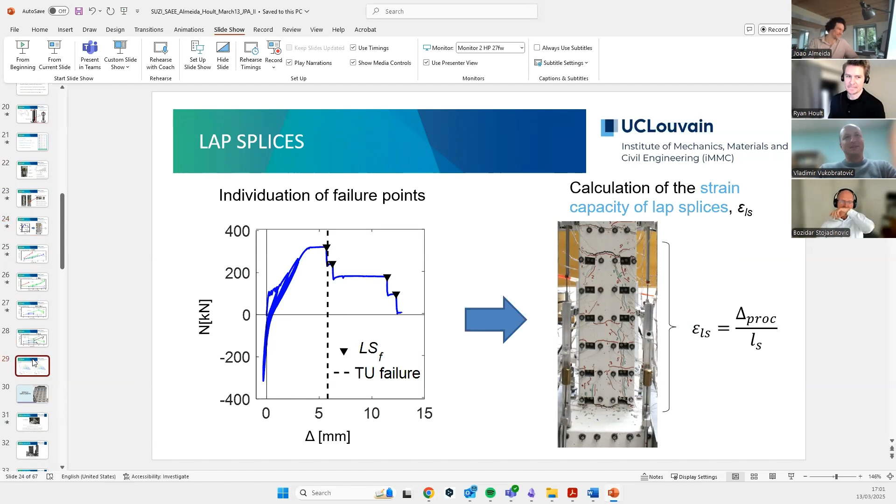It's always like this, so I'm the one who starts the discussion. I'd refer firstly to the splices. Even though I'm not so into the finance stuff, the investors are pretty much into it. So it would be good to see the cost analysis at some point, because you have a lot of specimens and things you tested, to see the difference in price between regular splicing and mechanical devices. We give them advice to switch to mechanical devices, but they tend to keep their approach, and you cannot explain to them that this is not healthier, even though it's cheaper - but it's not so much cheaper. Maybe you can comment on that.

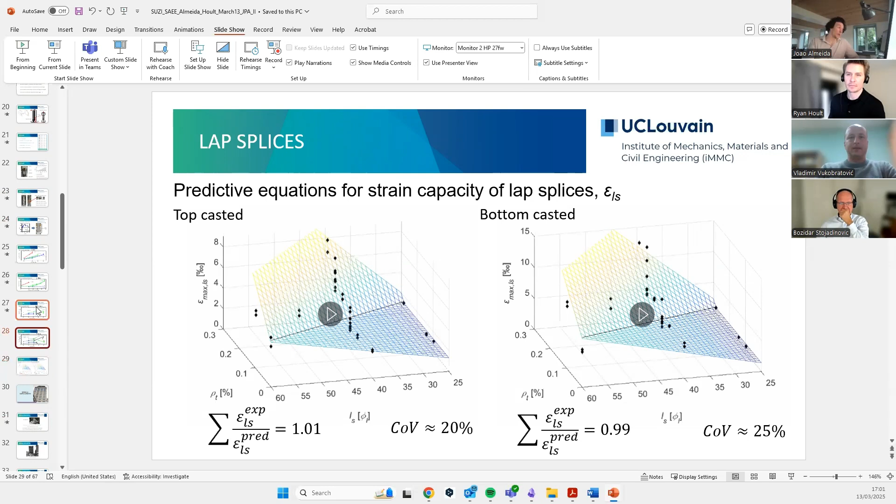Yeah, you're absolutely right, there are a lot of mechanical couplings that could eventually replace lap splicing. I have to say I'm a little removed from what is currently being done in practice, especially in seismic regions in Europe. In Portugal, which I know better, and in Italy, I think it's the same - there's always difficulty adopting even minor changes in construction practice. This is something we've tried to keep in mind in our experimental research: how can minimal changes to construction practices that seem anchored for dozens of years, just keeping what they already know, reflect an improvement in seismic response? That's why we explored shape memory alloys - construction companies can keep their know-how and just replace one bar with another. But you're absolutely right, I don't know where this resistance comes from. As you say, possibly in terms of cost analysis it would be preferable, but I really don't have any amazing answers to this.

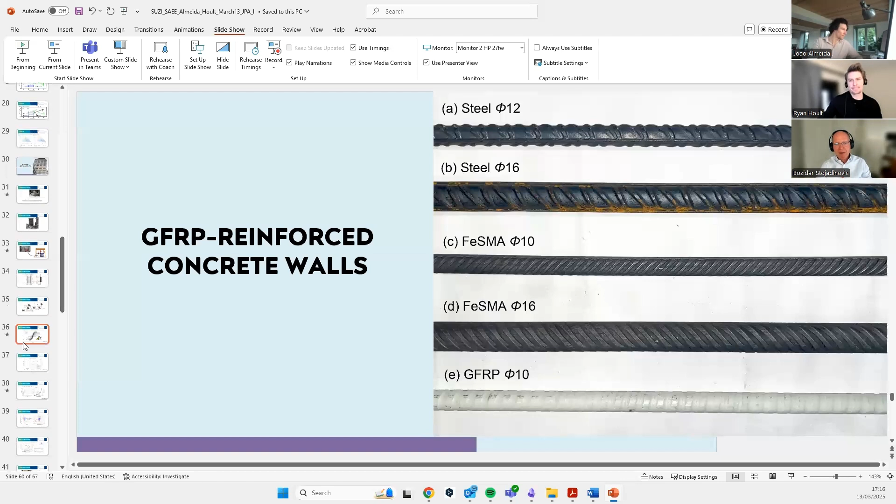I mean, your interaction diagrams show that there is a very significant decrease of the moment capacity of the wall, which we would consider its primary resistant capacity, when the torsion moment exceeds a value, the value when the line becomes straight.

And that's, I don't know, a little bit more than half of the torsion capacity of the wall.

Well, determining that 0.6 of the torsion capacity is good to know, but is there a way for a designer to use other measures in terms of giving the structure more symmetry, a way to control the amount of torsion by reducing eccentricity and therefore preserve the moment capacity of the walls? Would that be an incentive to change the structural configuration rather than fight torsion somehow?

Ryan, do you want to address this question? I agree, I think you're on the money with both of those things. First of all, I think increasing the wall thickness, in my view, is just the easiest thing to do to avoid out of plane instabilities.

And I think it's the same approach for a building. You want to avoid torsion as much as possible by making sure that there really is... it's difficult to avoid, obviously, because engineers are fighting architects as well in terms of where you're placing these walls. So you're always going to have some eccentricity of the center of stiffness away from the center of mass. But certainly try to avoid the example I gave where you have that building core right out on the perimeter.